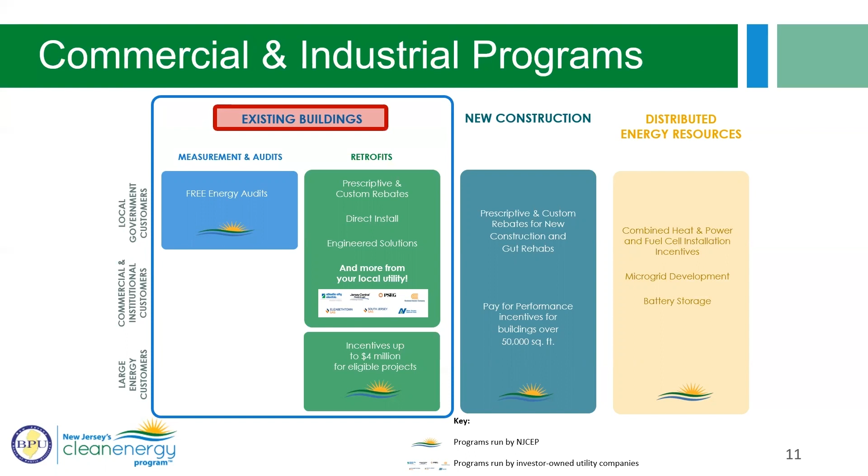The first of those programs is the Local Government Energy Audit Program, also known as LGEA. This is a free program available to local governments, colleges, universities, as well as nonprofits. If eligible, this energy audit is free and will provide a wealth of information about applicable programs and technologies, in addition to identifying valuable cost savings.

Next, we have our Large Energy Users Program. This program is available for larger C&I entities with an average peak energy demand equal to or over 400 kilowatts. Additionally, to qualify, they must have paid at least $5 million in utility bills for the previous year. This program is typically used by large hospitals and college campuses and is most appropriate for larger organizations with multiple buildings. These projects also often include energy resiliency measures like combined heat and power and fuel cell technologies.

Now let's move on to our programs geared towards new construction or gut rehab projects. As previously mentioned, the Clean Energy Program is now the sole administrator for new construction energy efficiency incentives in New Jersey. It's important to stress that any size new construction or gut rehab project may be eligible for incentives. We do, however, require that these projects exceed the current ASHRAE codes. And depending on your project need, our programs are broken down into tiers.

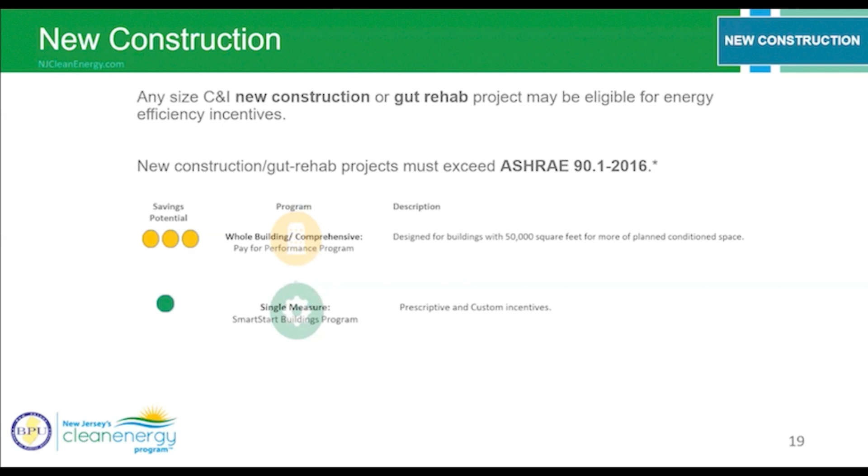Tier 1 is for single measure projects. Within this tier, we have our Smart Start program with both prescriptive and custom incentives. The last tier is for larger size projects, and within this tier, we have the Pay for Performance program, also known as P4P.

I just want to take one moment to clarify one thing. We often get questions on the definition of gut rehabs, as this can be subjective. So you'll find these 3 definitions in our new program guides, which make a gut rehab project eligible for New Jersey's Clean Energy Programs for new construction. These requirements include any one of the following: either a change of use and reconstruction of an existing building, or construction work of a nature requiring that the building or portion of the building be out of service for at least 30 days, or where there's reconstruction of a vacant structure or portion of the building.

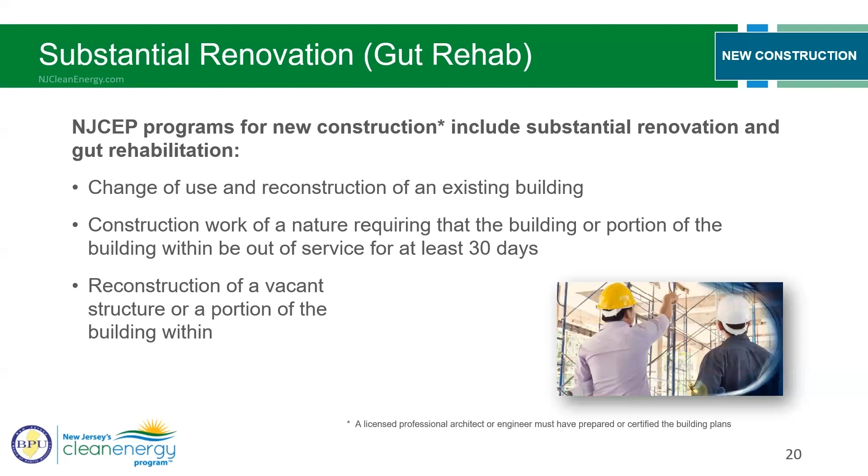Now let's dive into the different programs that New Jersey's Clean Energy Program has to offer for new construction and gut rehab projects. The first program is known as Smart Start. This program is available for all C&I new construction projects, and there is no size requirement to qualify.

This is simply a single measure rebate program. So if you're planning on installing energy efficient equipment in your new facility or within an expansion or gut rehab, you may be eligible to receive rebates for those items. What's unique about the Smart Start program is that you have 12 months after the purchase and installation of a prescriptive measure to apply for a rebate. Many types of energy efficient equipment with certifications like Energy Star are included within our prescriptive list, and that list will clearly show the equipment type and the associated incentive.

Here is an example of a project that used our Smart Start program. As you can see, for this project, our incentive helped cover 1/3 of the project cost, while also having an annual cost savings of almost $36,000.

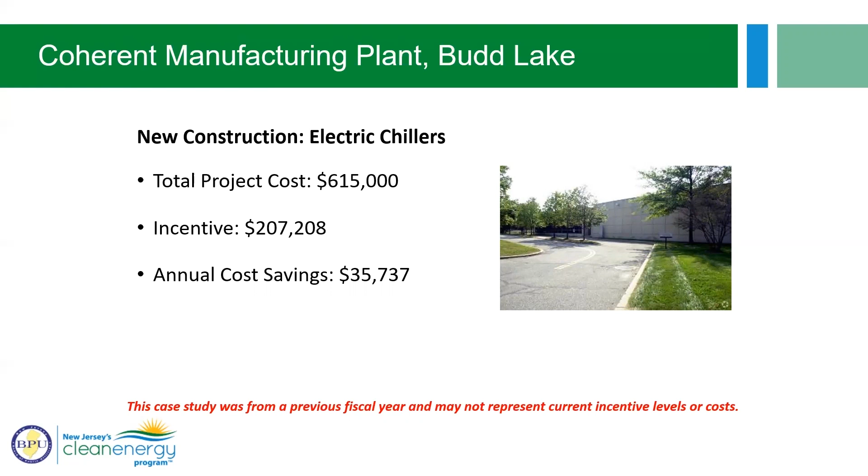While I have your attention today, I feel it's a perfect time to also highlight a rapidly growing industry that can utilize our program offerings. We know that these days there are plenty of new construction of indoor farms, greenhouses, and horticultural operations throughout the state of New Jersey, including appropriately licensed indoor cannabis grow operations.

The Clean Energy Program offers prescriptive incentives for DLC listed indoor horticulture LED lighting. We have varying incentive rates based on the fixture wattage and the annual runtime of the facility. We hope the prescriptive incentive will make this application process even easier.

Additionally, for other measures in the building, like HVAC systems, ventilation, and pumps, which all add a significant energy load to these types of facilities, custom incentives may be able to offset those costs, or you can consider going the pay-for-performance path if you'd like to take a whole building modeling approach.

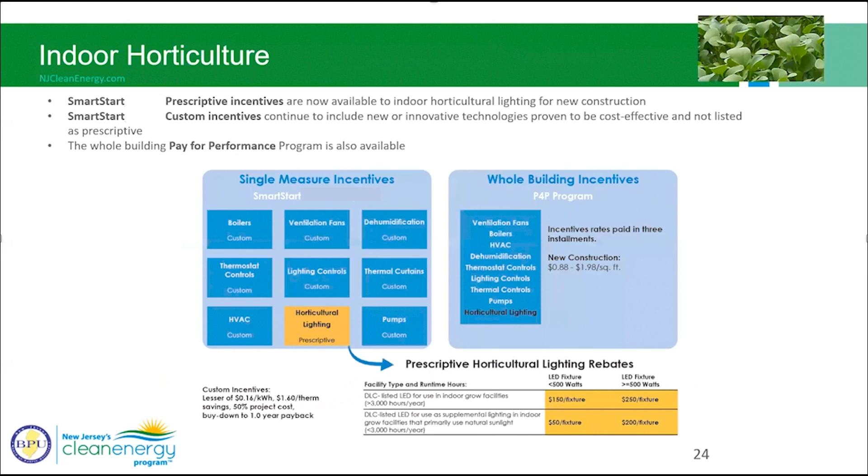If your new construction project is over 50,000 square feet of planned new construction or gut rehab space, you may want to consider our comprehensive offering known as Pay for Performance, or P4P. This is a more data-driven and holistic approach to whole building energy efficiency and can include other items not available through Smart Start, including building envelope measures like windows and insulation.

In order to be eligible for P4P, 2 or more energy efficiency measures must be planned that will result in at least 5% energy savings compared to the ASHRAE code, increasing to 15% for multifamily buildings. The incentive cap for this program is 50% of the project cost up to $2 million per project, or $4 million per entity annually.

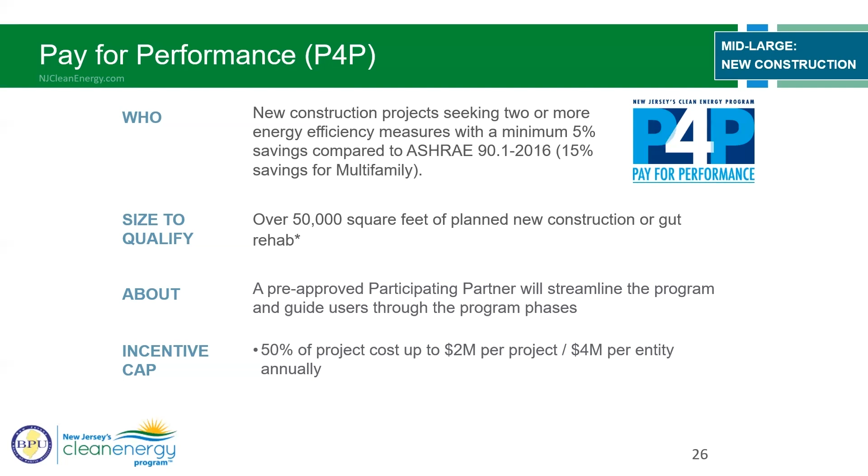The total incentives are split up into 3 payments, which correspond to project milestones. The first is the approval of the energy reduction plan. The next is upon verification of installed measures, and the last payment occurs after these savings have been verified.

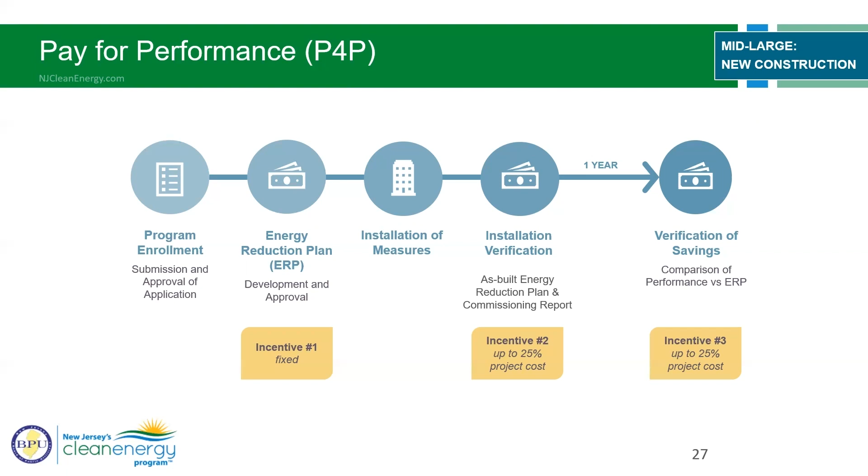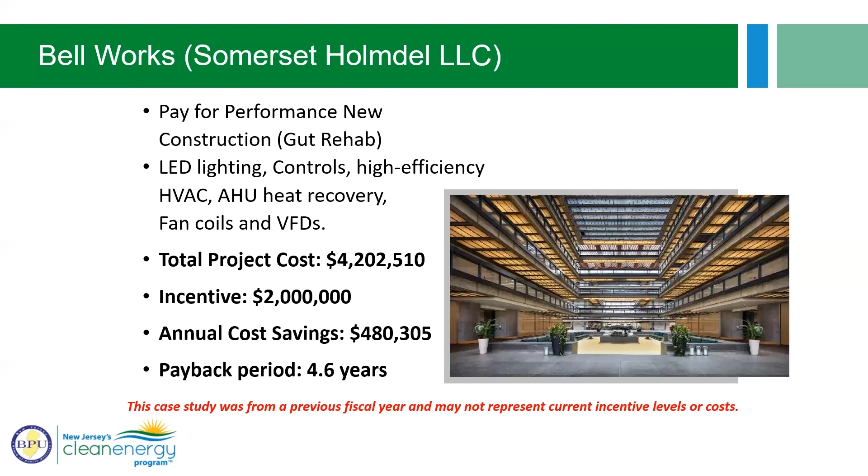Now I will briefly provide an overview of our program for distributed energy resources.

This last bucket within our C&I portfolio relates to distributed energy resources, dealing with programs that improve resiliency, such as combined heat and power for on-site generation. CHP is for customers who want on-site generation and are not utilizing their waste heat. There is no size requirement to qualify, and this technology enables you to be resilient when power from the grid is not available. We see this used frequently by hospitals to ensure operation during severe storms and outages.

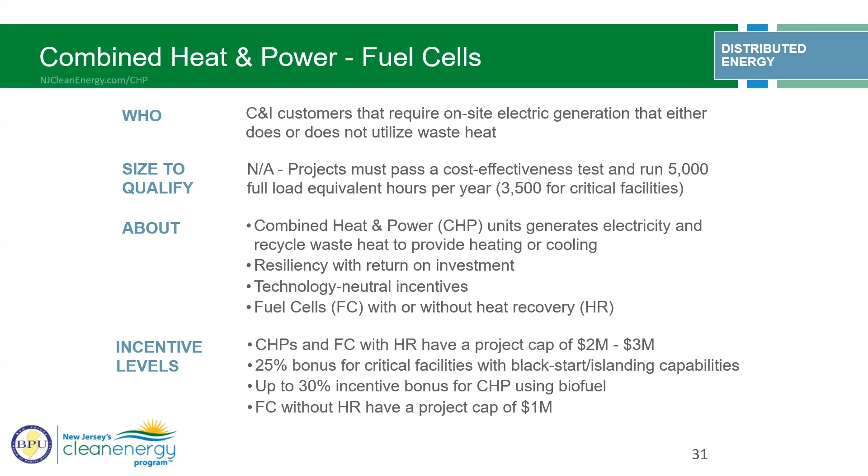I will now dive into the residential new construction programs. This program pertains to any residential project looking to do new construction, reconstruction, or a gut rehab. These homes operate at 15 to 50% more efficiently than a new home built to code and can save up to $200 to $400 annually.

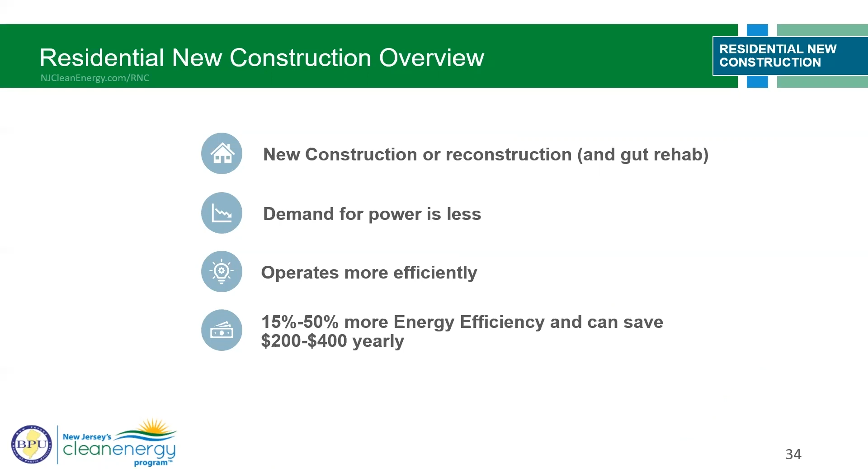The construction of new homes presents a unique opportunity for both the builder and the customer. For the builder, this helps bring in more work for your company, and for the customer, you receive a home that is affordable, comfortable, and most importantly, energy efficient.

There are 4 levels of participation. Energy Star homes are designed and built to standards well above other homes on the market today. Zero Energy Ready homes, or Zero Energy Ready homes plus solar, are high performance homes, so energy efficient that all or most of the annual energy consumption can be offset by renewable energy. We see this as the home of the future.

New construction multifamily projects seeking 2 or more energy efficiency measures with a minimum of 15% savings compared to the ASHRAE code can be considered. The first step for this program is to contact at least 3 New Jersey raters for proposals. Raters' contact information can be found on the New Jersey Clean Energy Program website.